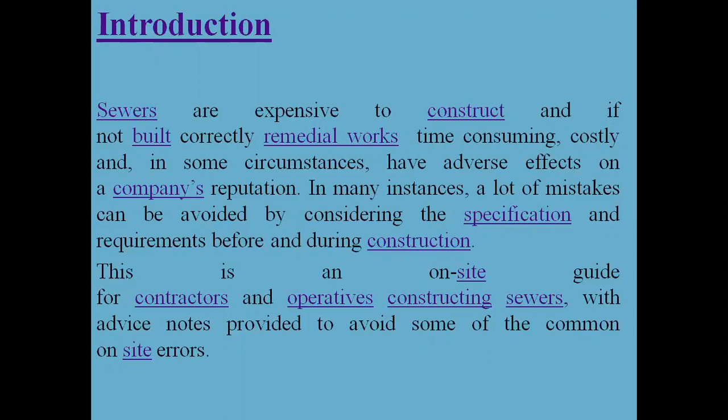Today I cover unit number 4, sewage schemes and their importance, Environmental Engineering. Introduction. Sewers are expensive to construct and if not built correctly, remedial works are time consuming, costly, and in some circumstances have adverse effects on a company's reputation. This is an on-site guide for contractors and operatives constructing sewers, with advice notes provided to avoid some of the common

on-site errors. Mainly, sewers are extremely important components of urban infrastructure that help keep the urban environment safe from flooding and prevent the spread of waterborne diseases by safely transporting wastewater to the wastewater treatment works and through the transport of rainwater from urban surfaces.

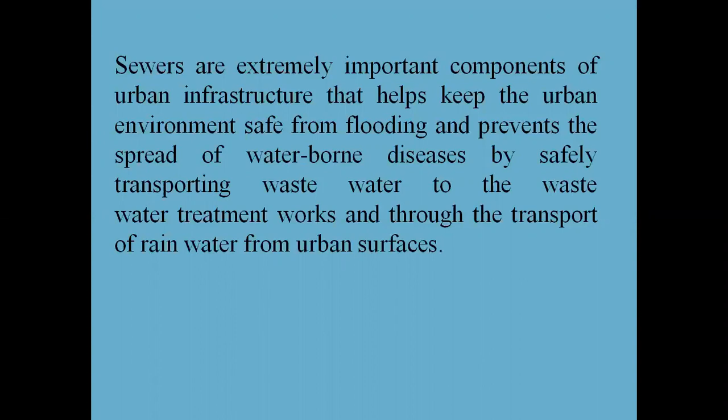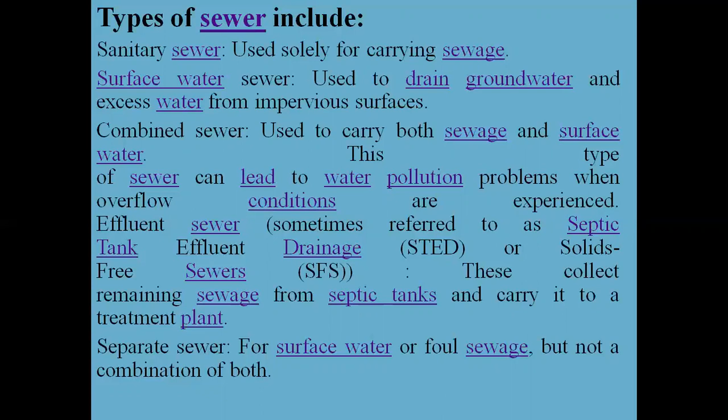Types of sewers include sanitary sewers, used solely for carrying sewage; surface water sewers, used to drain groundwater and excess water from impervious surfaces; and combined sewers, used to carry both sewage and surface water. This type of sewer can lead to water pollution problems when overflow conditions are experienced. Effluent sewers, referred to as septic tank effluent drainage (STED) or solids-free sewers, collect the remaining sewage from septic tanks and carry it to treatment plants.

Sewers are expensive to construct and if not built correctly, remedial works can be disruptive, time consuming, costly, and in some circumstances have adverse effects on companies' reputations. Sewers for Adoption contains guidance for the design and construction of sewers that will be adopted by sewerage undertakers.

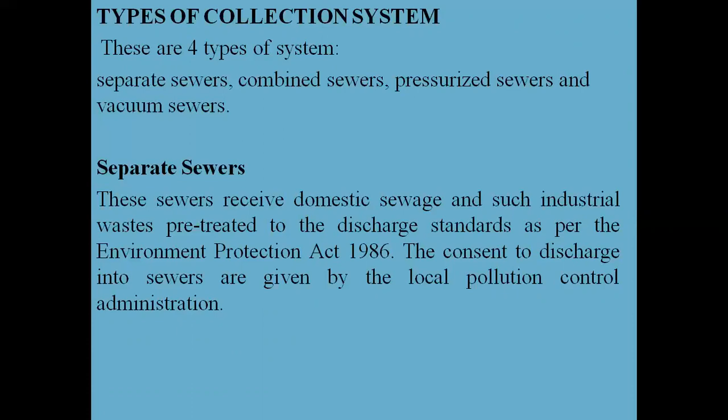There are 4 types of collection system: first, separate sewers; second, combined sewers; third, pressurized sewers; and last, vacuum sewers. First one is separate sewers. These sewers receive domestic sewage and such industrial wastewater pre-treated to the discharge standard as per the Environment Protection Act 1986. Second one is combined sewer.

This sewer receives storm water in addition and has some advantages in locations of intermittent rainfall almost throughout the year and where the terrain permits gravity collection, and obviously being confined to a very small region as a whole. Otherwise, in regions of seasonal rainfall like monsoons, the combined system will have serious problems in achieving self-cleansing velocities during the dry season, necessitating complicated egg-shaped sewers, etc.

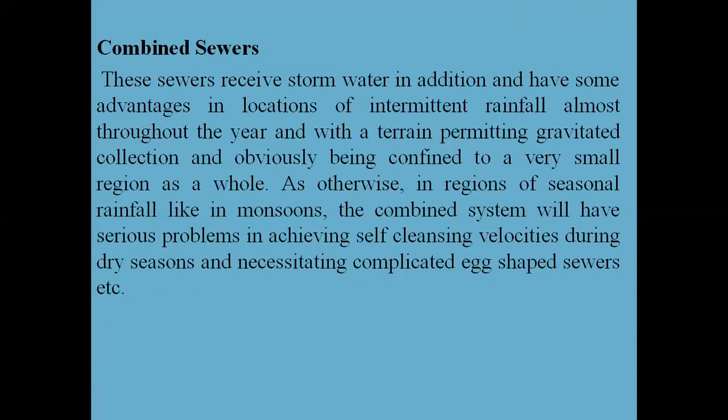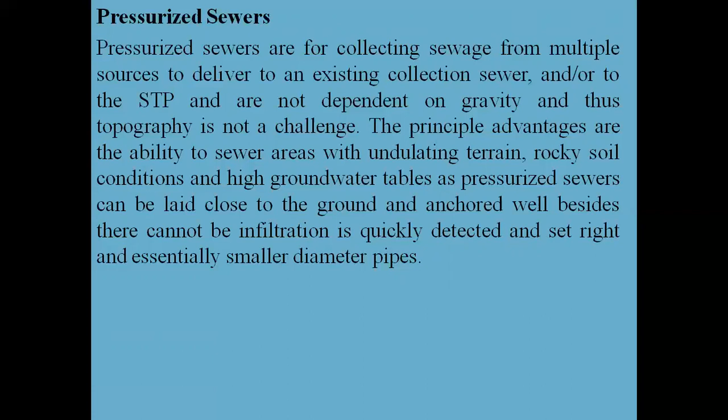Third one is pressurized sewer. Pressurized sewers collect sewage from multiple sources to deliver to existing collecting sewers and to the STP, and are not dependent on gravity, and thus topography is not a challenge. The principal advantages are the ability to sewer areas with undulating terrain, rocky soil conditions and high groundwater tables; pressurized sewers can be laid close to the ground; infiltration is quickly detected and set right; and essentially smaller diameter pipes.

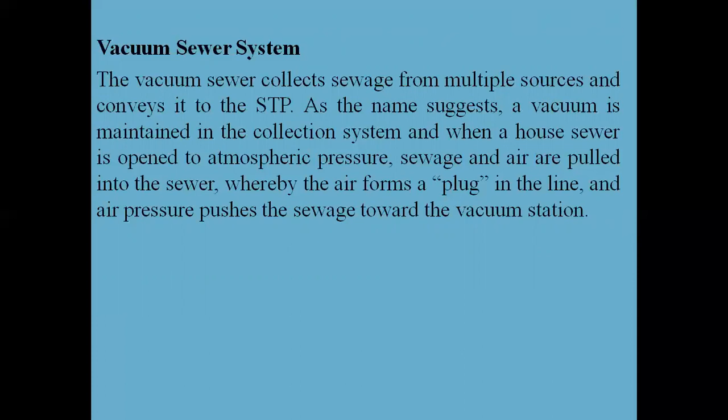And last one is vacuum sewer systems. The vacuum sewer collects sewage from multiple sources and conveys it to the STP. As the name suggests, a vacuum is maintained in the collection system, and when a house sewer is opened to atmospheric pressure, sewage and air are pulled into the sewer, whereby the air forms a plug in the line and air pressure pushes the sewage towards the vacuum stations.

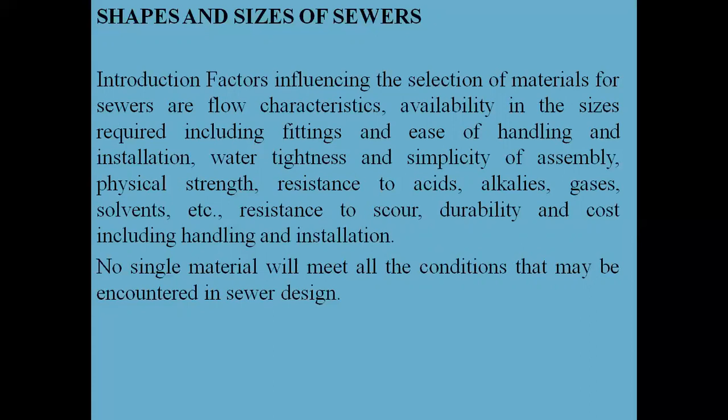Next topic, shape and sizes of sewers. We know sewers come in various shapes and sizes. First, the introduction. Factors influencing the selection of material for sewers are flow characteristics, availability in the size required including fittings, ease of handling and installation, water tightness and simplicity of assembly, physical strength, resistance to acids, alkalis, gases, solvents, etc., resistance to scour, durability, and cost including handling and installation. No single material will meet all the conditions that may be encountered in sewer design.

First one is brickwork. Brickwork is used for construction of sewers, particularly in the larger diameters. Many old brick sewers are still in use, and the failures are mainly due to the disintegration of the bricks and the mortar joints. Because of the comparatively high cost, larger space requirements, slower progress of work, and other factors, brick is now used for sewer construction only in special cases.

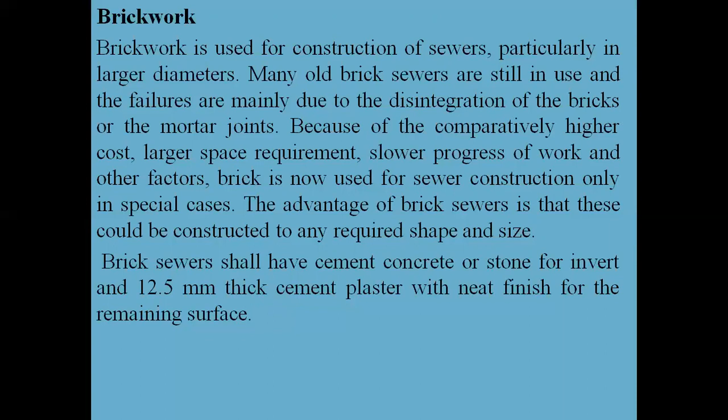The advantage of brick sewers is that these could be constructed to any required shape and size. Brick sewers shall have cement concrete or stone for invert and 12.5 mm thick cement plaster with neat finish for the remaining surfaces. Second one is concrete.

The advantages of concrete pipes are the relative ease with which the required strength may be provided, feasibility of adopting a wide range of pipe sizes, and the rapidity with which the trench may be backfilled. However, these pipes are subject to crown corrosion by sulfide gas, mid-depth water line corrosion by sulfate, and outside deterioration by

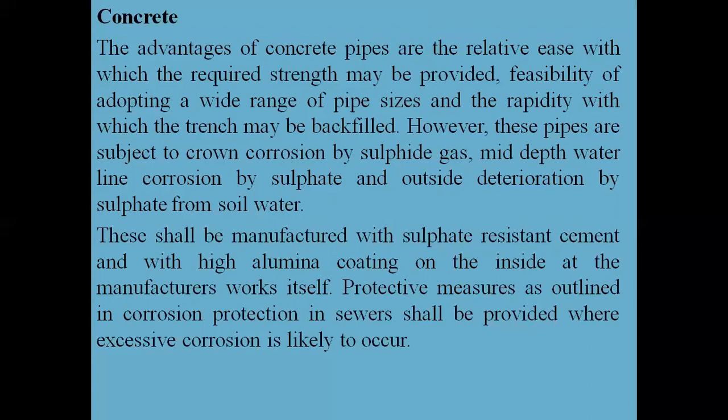sulfate from soil water. These shall be manufactured with sulfate resistant cement and with high alumina coating on the inside at the manufacturer's. Protective measures as outlined in corrosion protection in sewers shall be provided where excessive corrosion is likely to occur. Third one, precast concrete.

Plain cement concrete pipes are used in sewer systems on a limited scale only, and generally reinforced concrete pipes are used. Non-pressure pipes are used for gravity flow, and pressure pipes are used for force mains, submerged outfalls, inverted siphons, and gravity sewers where absolute water-tight joints are required. Non-pressure pipes used for construction of sewers and culverts shall conform to IS 458. Certain heavy-duty pipes not specified in IS 458 should conform to other approved standards.

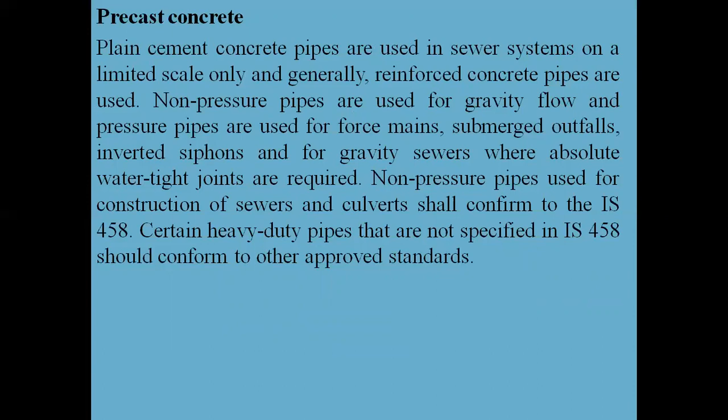Cast iron pipes and fittings have been manufactured in the country for several years. These pipes are available in diameters from 80 mm to 1050 mm and are covered with protective coating. Pipes are supplied in 3.66 meter and 5.5 meter lengths.

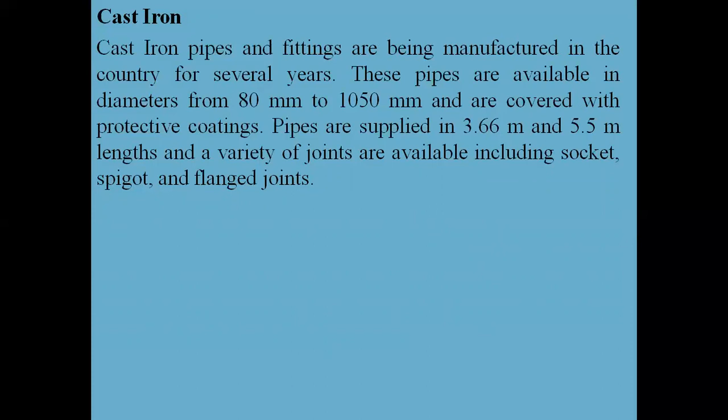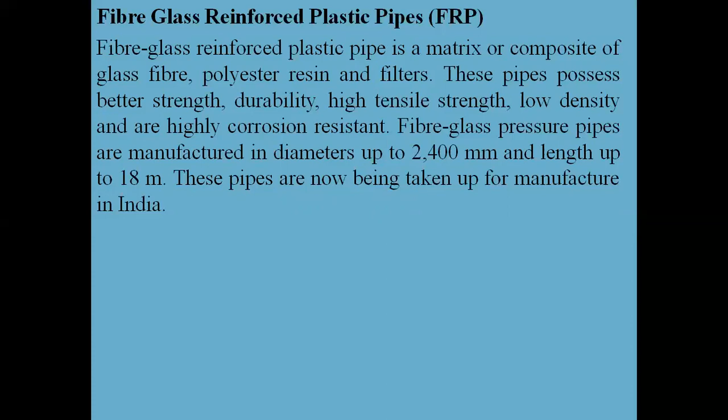Fiberglass reinforced plastic pipes are a matrix or composite of glass fiber, polyester and fillers. These pipes possess better strength, durability, high tensile strength, low density, and are highly corrosion resistant. They are manufactured in diameters up to 2400 mm and lengths up to 18 meters. These pipes are now being taken up for manufacture in India.

Further, the following factors must be carefully considered in sewers. First is hydraulic efficiency: the material selected should be such that the value of Manning's coefficient N is as low as possible, so that a hydraulically efficient surface is available.

Second, resistance to abrasion. Sewers may contain a lot of solids such as grit and sand particles. At high velocity at the sewage invert, erosion of sewer material may take place due to abrasion. For a longer life, the sewer material must possess a high degree of resistance to abrasion.

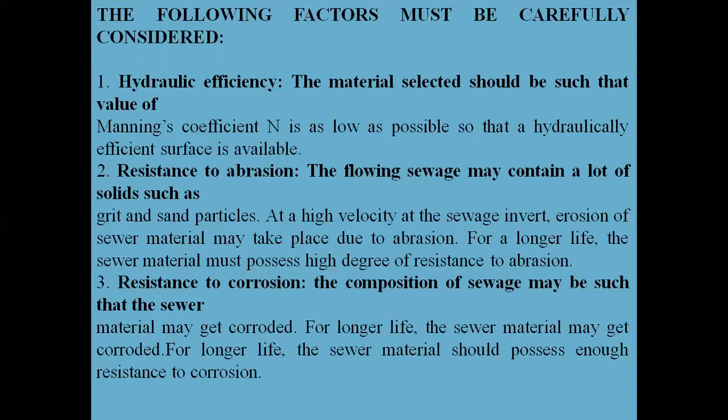Third is resistance to corrosion. The composition of sewage may be such that the sewer material may get corroded over time. For longer life, sewer material should possess enough resistance to corrosion.

Strength: sewers are generally laid underground and hence are subjected to a number of external forces, including the weight of overburden and live loads. The material should be strong enough to resist all such external forces.

Durability: the sewer material should be durable so that expenditure due to its frequent replacement is minimal. Cost: the cost of the material should be low so that overall economy is maximum.

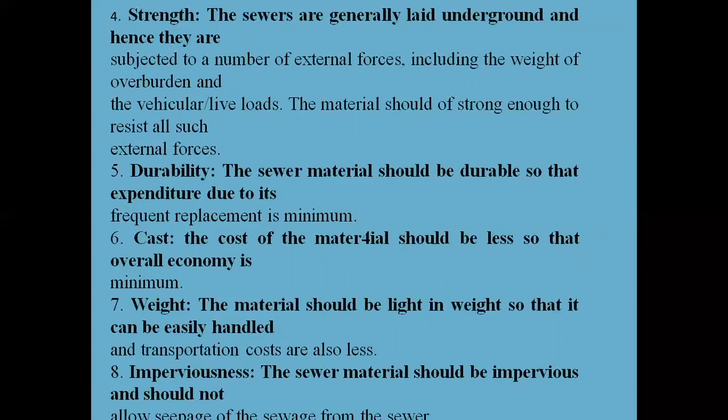Weight: the material should be light in weight so that it can be easily handled. Imperviousness: the sewer material should be impervious and should not allow seepage of sewage from the sewer.

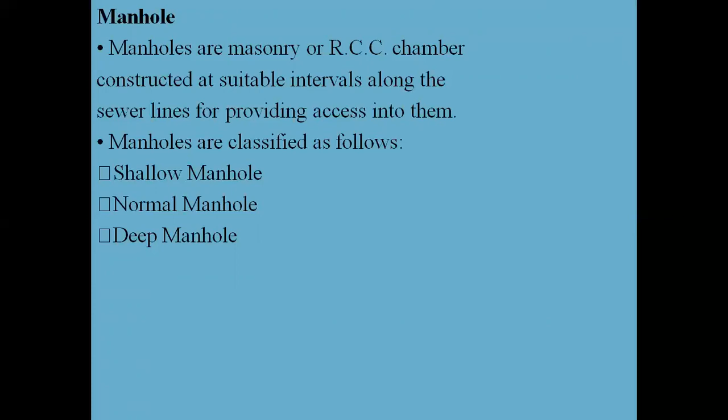Manholes. There are several types of manholes. Manholes are masonry or RCC chambers constructed at suitable intervals along the sewer lines for providing access into them. Manholes are classified as follows: first, shallow manhole; second, normal manhole; and third, deep manhole.

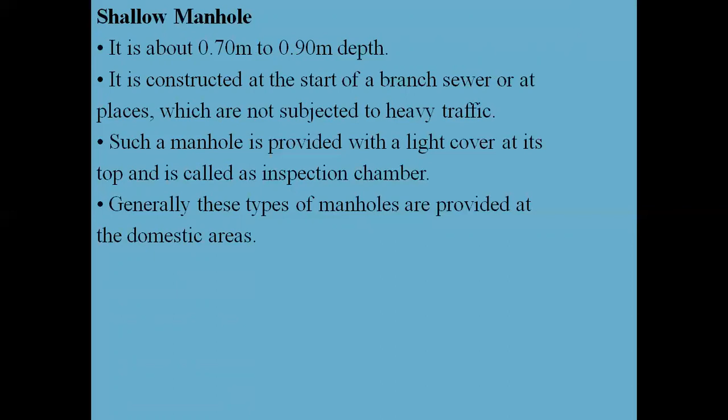Shallow manhole is about 0.7 to 0.9 meter in depth. It is constructed at the start of a branch sewer or at places not subjected to heavy traffic. Such a manhole is provided with a light cover at its top and is called an inspection chamber. Generally, these types of manholes are provided in domestic areas.

Second is the deep manhole, having a depth of more than 1.5 meters. The section of such a manhole is generally not kept the same; the size in the upper portion is reduced by providing offsets. Steps are provided in such manholes to facilitate descending into the manhole and to enable workers to go up from its bottom.

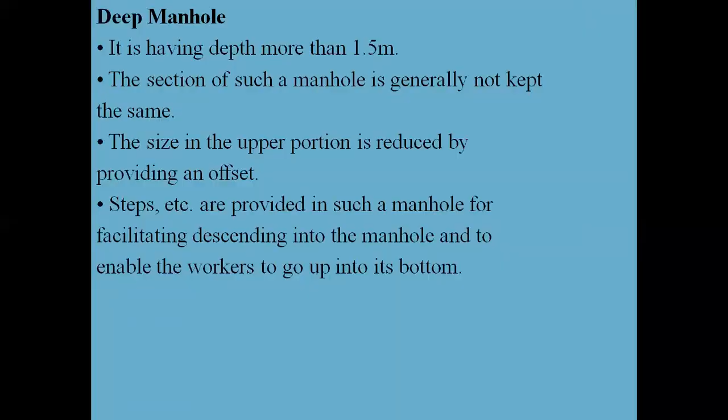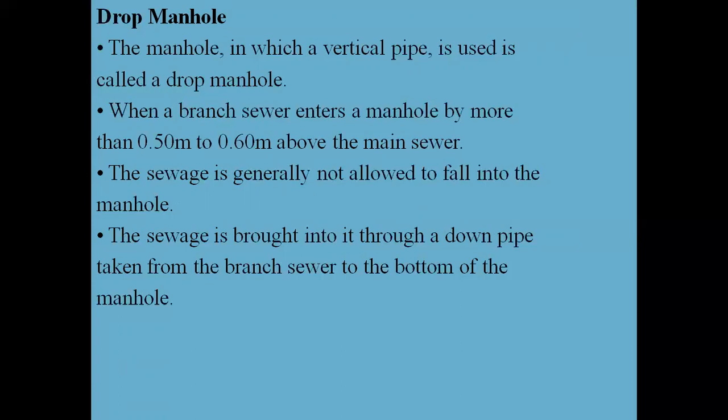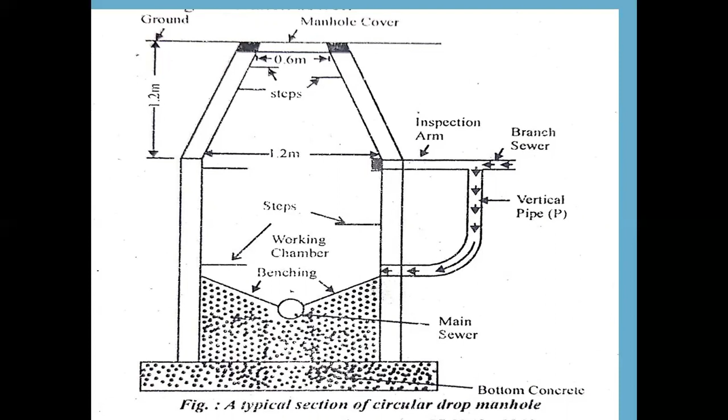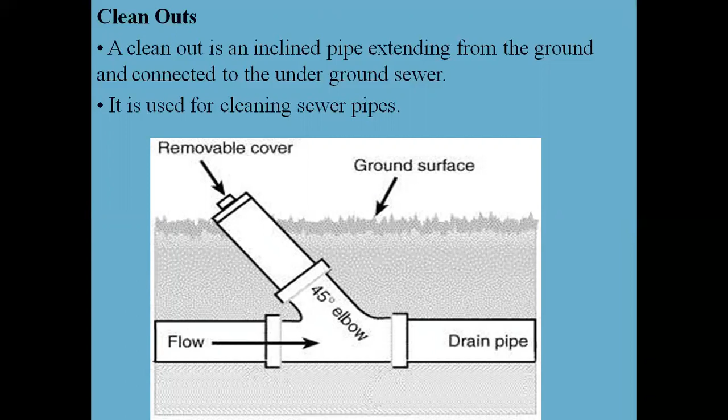Street inlets. Street inlets are openings on the road surface at the lowest point for draining rainwater runoff from the roads and admitting it into the underground stormwater sewers. There are two types of street inlets: vertical inlets and horizontal inlets.

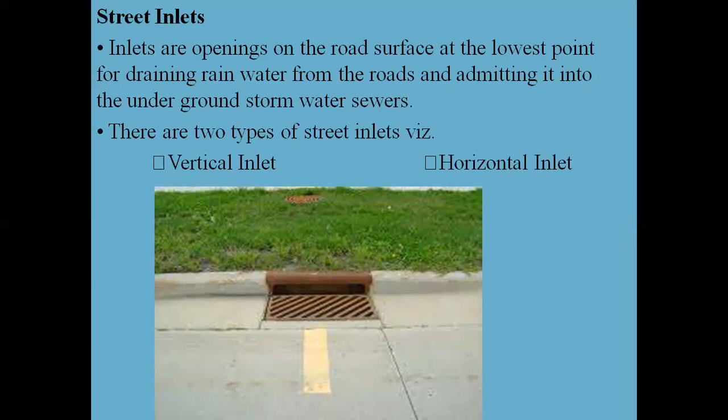Pumping. The problem of sewage pumping is the main or biggest problem of a sewage system. The pumping of sewage is not as simple as pumping water, since special problems are faced in sewage pumping. First, sewage has foul characteristics.

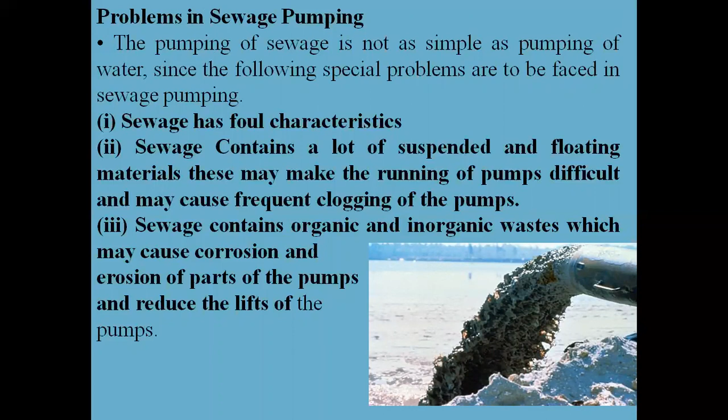Second, sewage contains a lot of suspended and floating material, which may make running the pump difficult and may cause frequent clogging of the pump. Third, sewage contains organic and inorganic waste which may cause erosion and corrosion of parts of the pump, reducing the life of the pumps. This diagram shows the pump outlets.

Pumping stations: location of pumping stations. The proper location of a pumping station requires a comprehensive study of the local area to be served, ensuring that the entire area can be adequately drained. If a very large quantity of sewage is to be pumped, the site should be near a stream or stormwater drain into which the sewage could be discharged during emergencies, such as a breakdown of the pumping plant.

If this precaution is not taken, the station should be located and constructed in such a manner that it will not be flooded at any time.

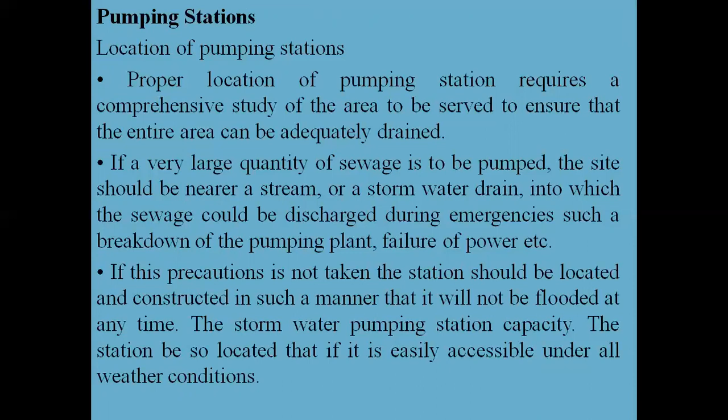Further elements of pumping stations: apart from the structure of the pump house, a sewage pumping station consists of the following elements: first, grit chamber; second, coarse and fine screens; third, sump well or wet well; fourth, pump room or dry well; fifth, pumps; sixth, miscellaneous accessories such as pipes, valves, float switching arrangements, flow recorders, emergency overflows, and ventilation arrangements such as extraction fans, etc.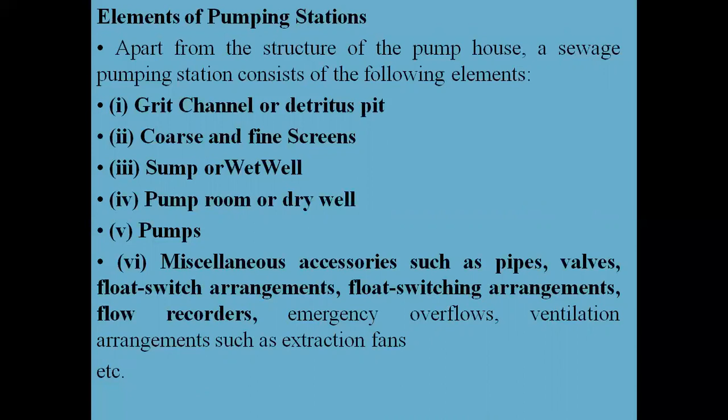Pumping stations consist of dry well, wet well, rising main, and pumps used. The dry well for housing the pumps is used to house them. The wet well is for incoming sewage. The rising main is to let the pumped sewage reach a high leveled gravity sewer. Pumps generally used in sewers and STP plants include centrifugal pumps, reciprocating pumps, propeller or axial flow pumps, and air pressure pumps or ejectors.

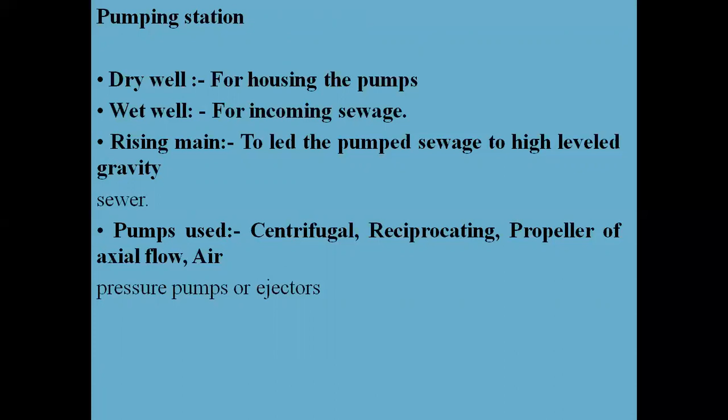Elements of pumping stations: pump house structure. The pump house structure should be designed to withstand flotation forces to which it may be subjected. The substructure of the pumping station may be of mass concrete or RCC, while the superstructure may be constructed of any material. The internal walls and floors should be structurally designed to take the weight of the machine along with a live load of 5 kilonewton per meter square.

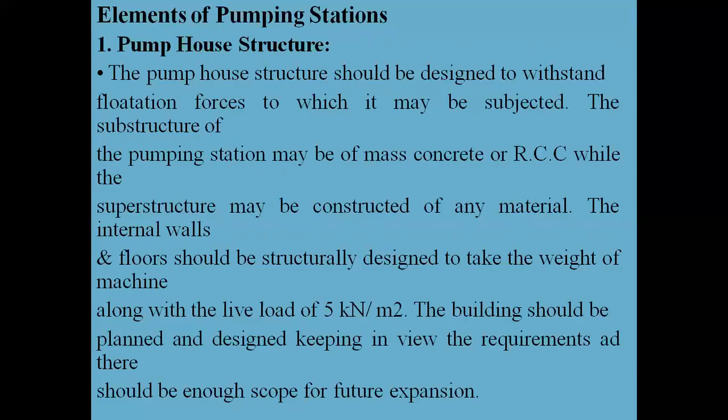The building should be planned and designed keeping in view the requirements. There should be enough scope for future expansions.

Second element: grit chamber. The sewage entering a pumping station contains a lot of solid matter such as grit, rags, sticks, faeces, etc., all of which is in suspension as long as the sewage is flowing. It is therefore essential to remove as much of this matter as possible before pumping so as to minimize wear and tear of the pump impeller and the rising main. The grit is separated from the sewage by provision of a grit and detritus pit before or after the screens.

A grit channel is a long basin with enlarged cross sections. This results in the reduction of velocity of flow to 0.15 to 0.3 meter per second.

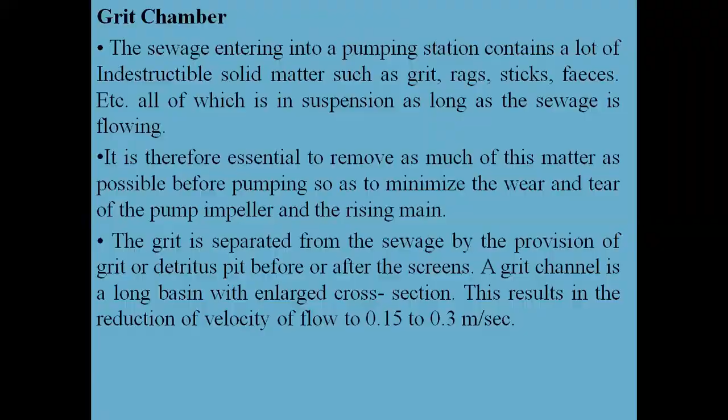This diagram shows the grit chamber, showing the inlet to collect grit particles, compressed air (optional), fats, oils, greases, and then the outlet.

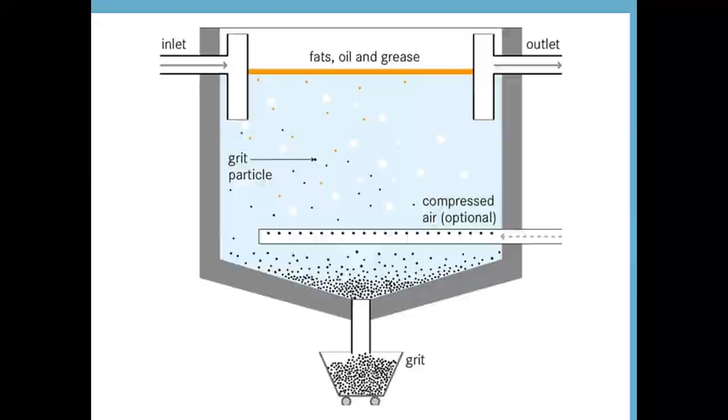Screens. After the removal of grit from the sewage, it is made to pass through the screens to trap floating matter such as rags, sticks, papers, and many types of raw materials, etc. It is necessary to remove these, otherwise they choke and damage the pump.

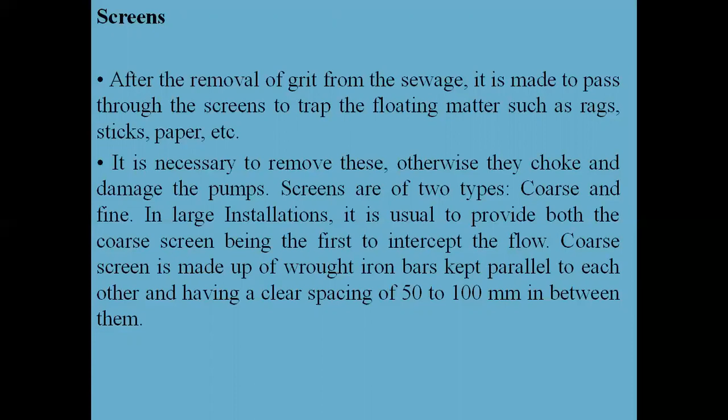Screens are basically two types: coarse screen and fine screen. In large installations, it is usual to provide both, with the coarse screen being the first to intercept the flow. The coarse screen is made up of wrought iron bars kept parallel to each other, having a clear spacing of 50 to 100 mm between them, for both coarse and fine screens.

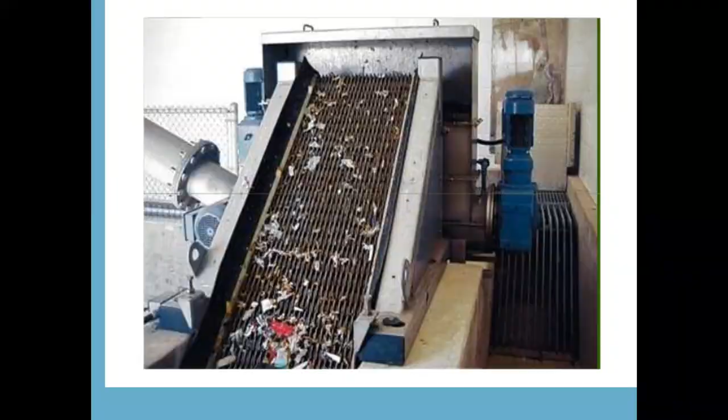Rising main, valves and fittings. The pumped sewage is led to a high leveled gravity sewer through rising mains. The length of the discharge pipe should be kept as small as possible because long detention of sewage in closed pipes under pressure causes anaerobic deterioration. As far as possible, rising mains should rise steadily from the pumping station to the point of discharge.

The velocity of flow in the rising main should not be less than 0.75 meter per second. At the same time, velocities higher than 2 meter per second should be avoided. That means the velocity of the rising main has a minimum speed of 0.75 meter per second and a maximum speed of 2 meter per second.

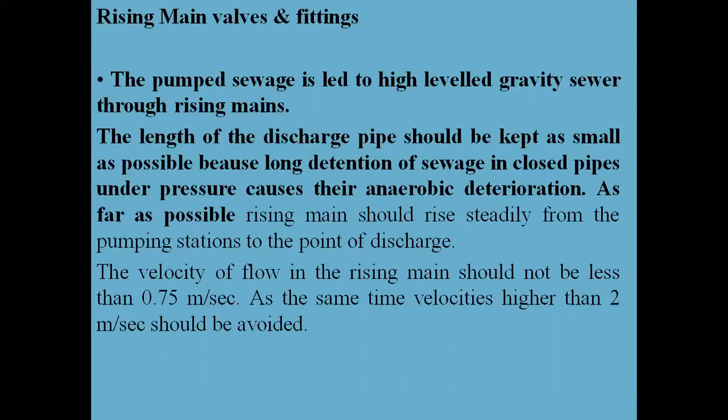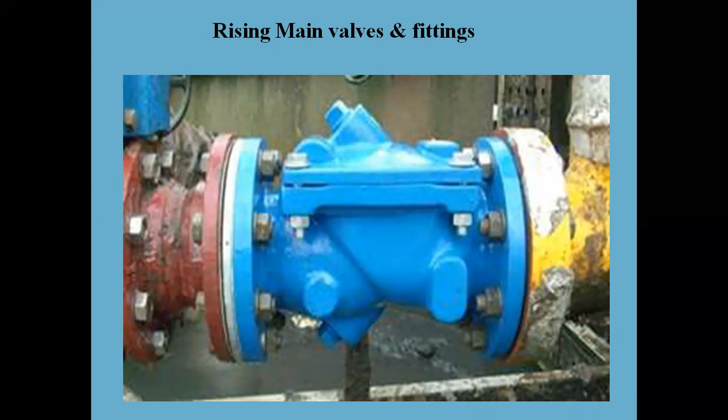This diagram shows the rising main valves and fittings. Next, check valves and gate valves. This diagram shows the check valve and gate valves.

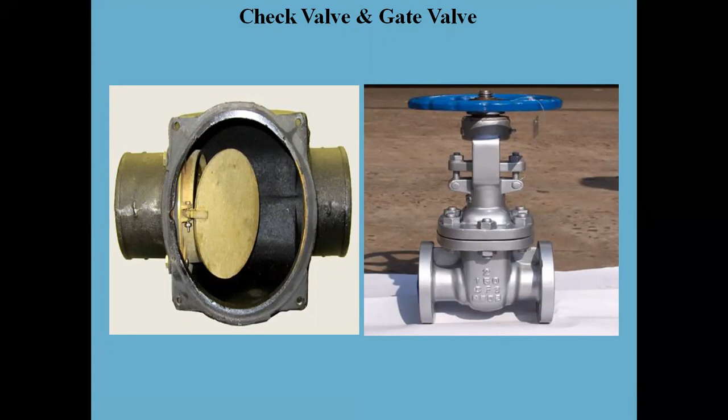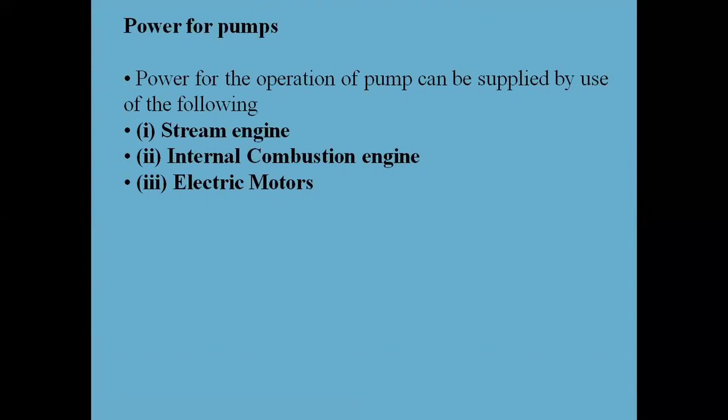Power for pumps: power for the operation of pumps can be supplied using the following: first, steam engine; second, internal combustion engine; and third, electric motor.